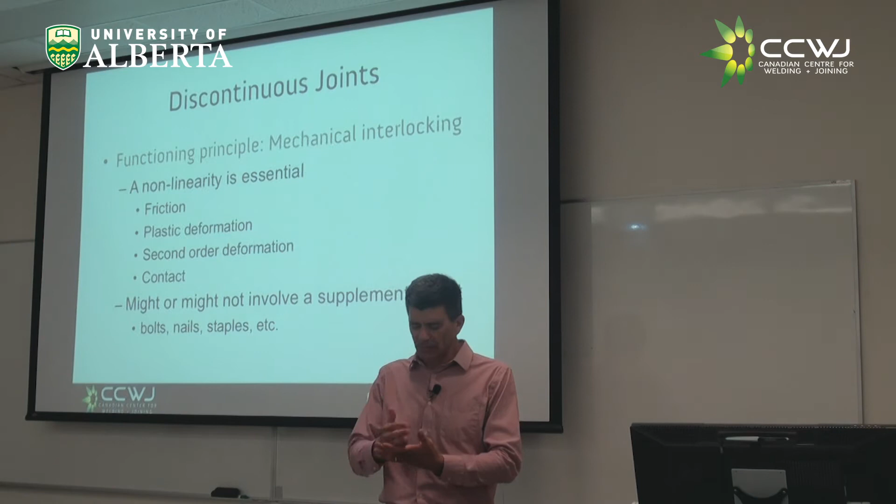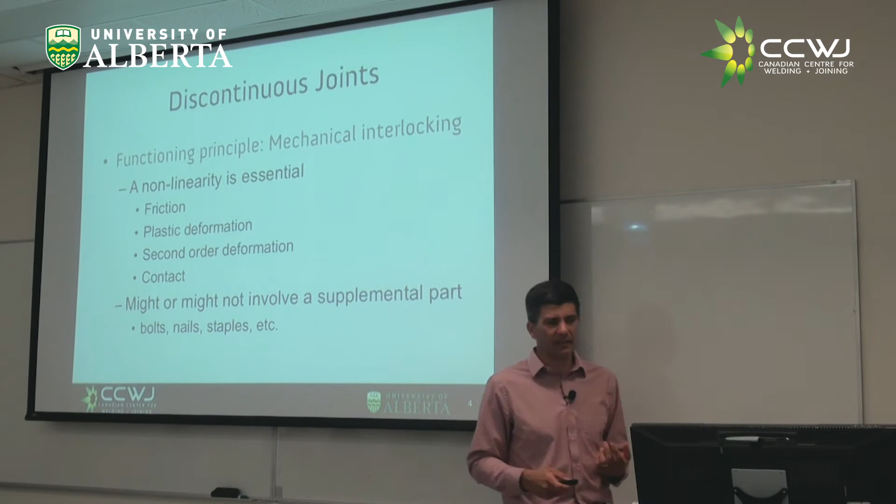So by going through this classification, there is also something interesting: if we make a taxonomy that is systematic, you might, if you're lucky enough, smart enough, given enough of a chance, by going through this systematic procedure, be able to invent or rediscover the joining technology you need, instead of just reciting what somebody else said or accepting what somebody else does.

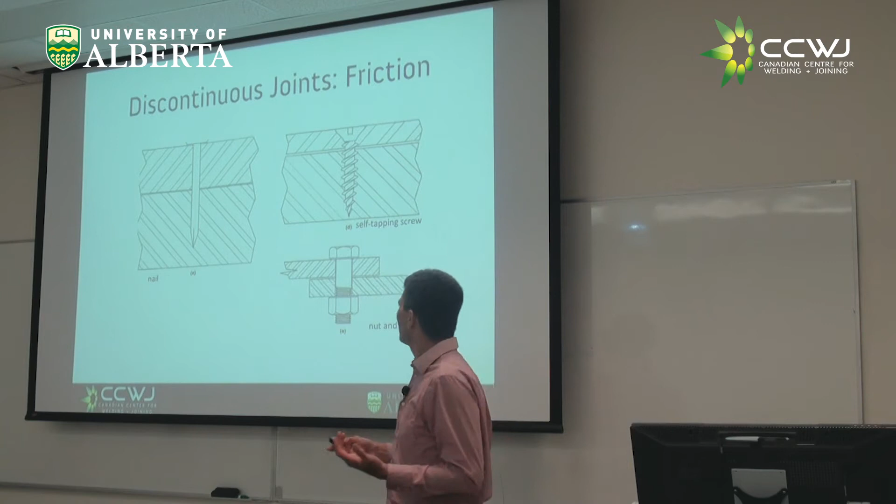So friction, for example, a nail. Have you ever thought that what holds two pieces of wood in your deck in your backyard is friction? If the nail was perfectly oiled up, it's good for nothing. Same with the screws, right? You screw something. If it wasn't for friction, you cannot get two things together, right? Nuts and bolts, self-tapping screws.

I mentioned this other nonlinearity, plastic deformation. For example, here you have a folded joint, right? Chances are that everybody here likes either beer or soda or both. When you get a can, that can has a body and has a lid. If they're together, they're joined. How are they joined? They are actually joined with this folded type of joint, and that involves plastic deformation. If you don't deform plastically, it's going to come out, right?

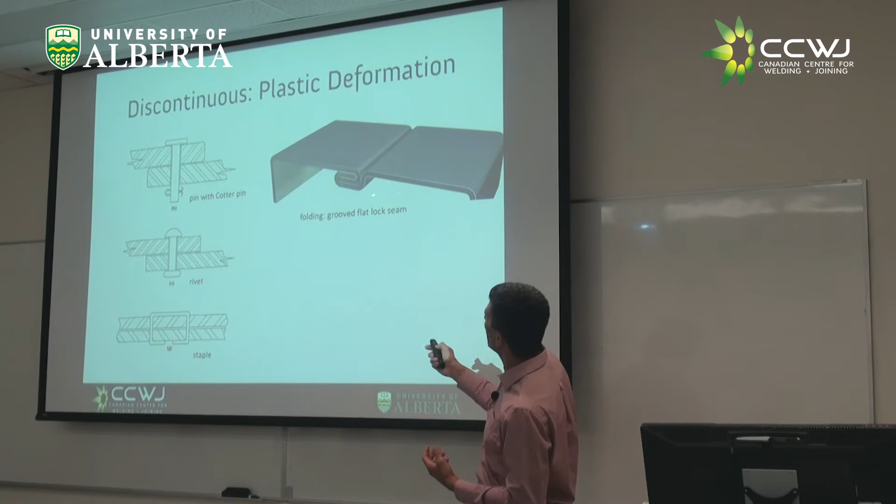Rivets, plastic deformation. You can have a pop rivet with the machine, or you could do super old school, the rivets that were red hot and you were hammering on. But in the end, the reason a rivet is keeping two things together is because you deformed it plastically. Same with a staple. You have an additional part in these cases. In this case, you don't have an additional part, but in this case, you do, right, for joining.

Second order deformation. Doesn't that sound like a cool buzzword here. Second order. It's not first order deformation, it's second order deformation. So what is this, right? First order deformation is a deformation that is so small that if it goes left or goes right, it's essentially more or less the same as not having gone anywhere. But second order deformation is something that moves enough such that moving a little bit to the left or to the right is not the same.

For example, if any of you ever tried to open about 10-year-old or 20-year-old electronics. Now they are all glued, the electronics. If you open a phone, it's glued. But before, they had this type of snap joints, right? So the snap joints are the ones that you put together and you hear snap, right? And so they can be irreversible when they are like a hook, right?

Why is it second order? Because when you press it, it came in and it deformed a bit. And when it wants to go out, it's not the same, right? It's locked. So it can be irreversible if it is a hook, it can be reversible if it is kind of this button, right? An example of this, like these snap-on buttons, right? That is second order deformation, right? But not plastic deformation, otherwise you could do it only once, right?

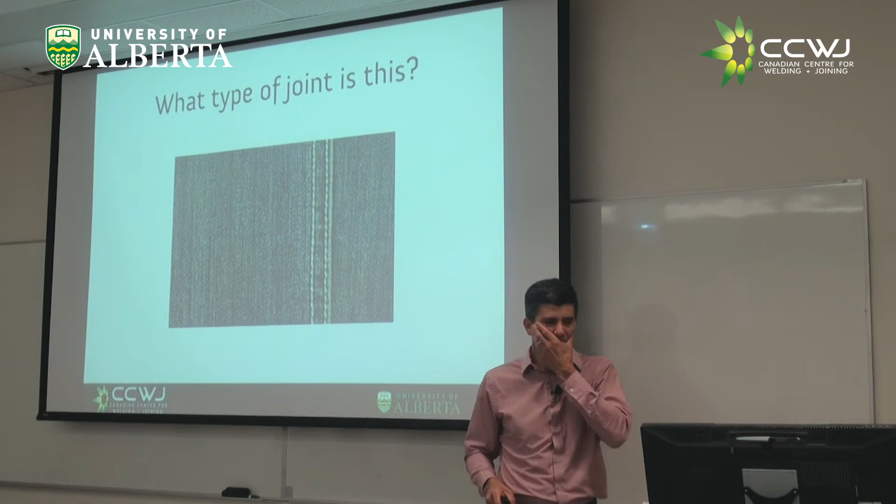Before we move into what is interesting, what type of joint is this? Say? It's a seam. That's a seam. That's good. And now this type of joint would be continuous or discontinuous? Yeah, I didn't teach you anything else. So good choice. And of course, this is discontinuous. There is nothing chemical in this. This is jeans, right? Like the stitching of jeans.

So what is the nonlinearity that we have here? What is the nonlinearity? Say? Friction. Do we have a supplemental part? Yeah, that's a thread, right? That's a supplemental part. It would be much like putting a staple, but in that case, the nonlinearity would be plasticity, right? But the beauty of this is that it's easy to put in and out. Remember last class I told you how knowing how to weld was so important to the Germans or to the Russians, and not doing the welds right was so bad in so many cases?

One of the keys in the development of humanity was joining, because putting the pieces of fur together to make clothing required joining, stitching. That's a huge invention. The reason we're not hairy like monkeys is because we could steal somebody else's hair, right? That's the only thing that helped us survive through the cold and all those things. And that all comes to joining.

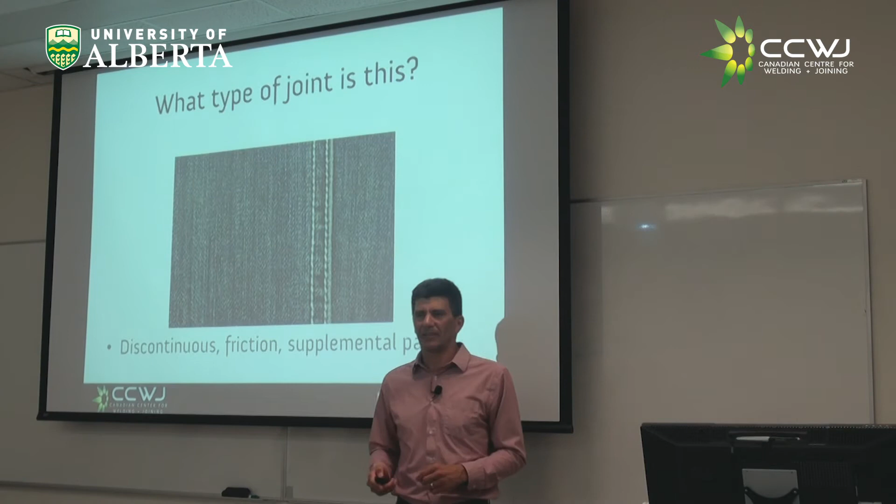But that's the joining of the Mechie, so let's forget that. I'm a Mechie, but I betrayed my roots, I guess. There you go. Discontinuous friction supplemental part. Super important. Who knew, right? No joining, no humanity. And the monkeys would get to keep their fur, right?

And whatever, the bisons. So let's talk about continuous joints. Those are the ones we care about, but this is still way beyond welding, because the key concept here is that now the atoms share their orbitals. And it can share the orbitals at many levels. This sharing of the orbitals is called rapprochement. I don't know who came up with that word. Again, another cool word to drop at a party. So this Friday, you guys are ready.

So this bonding can be chemical, in which things are really together, or can be more subtle, like van der Waals forces. You might have heard of van der Waals forces, right? Those are not a chemical joint, but the polarity of the molecules makes things stick together. For example, the screen protectors on cell phones, they have no glue, but they're stuck there. How? Van der Waals forces, right?

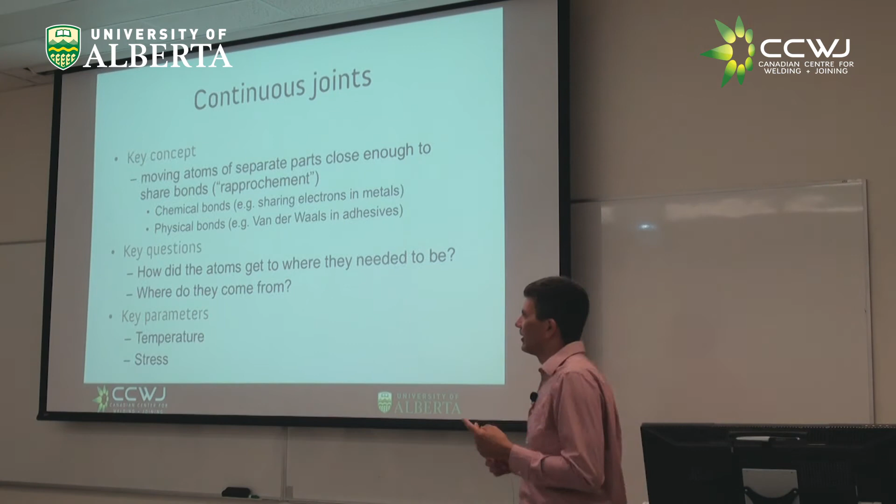So there are two key questions when we classify joining processes. One is how did the atoms get to rapprochement? How? And the second question is, where do they come from? Those two questions give us a sense of pretty much everything that means putting two things together in the form of continuous joints. Like anything else that involves chemistry, the key concepts here are pressure and temperature. Or pressure, let's call it stress.

Let's get the first. Diffusion bonding, right? People make a living out of this. We do close to none of this here in the province. It's called diffusion welding, but welding has a proper definition, and this doesn't meet the definition of welding. So in diffusion welding, you don't melt things. It's super gentle. And also, you don't put too much stress. This is like, I'm going to put the two of you together there, I hope you join. And they join. It's crazy, right? You make planes with this. You make crazy stuff with it.

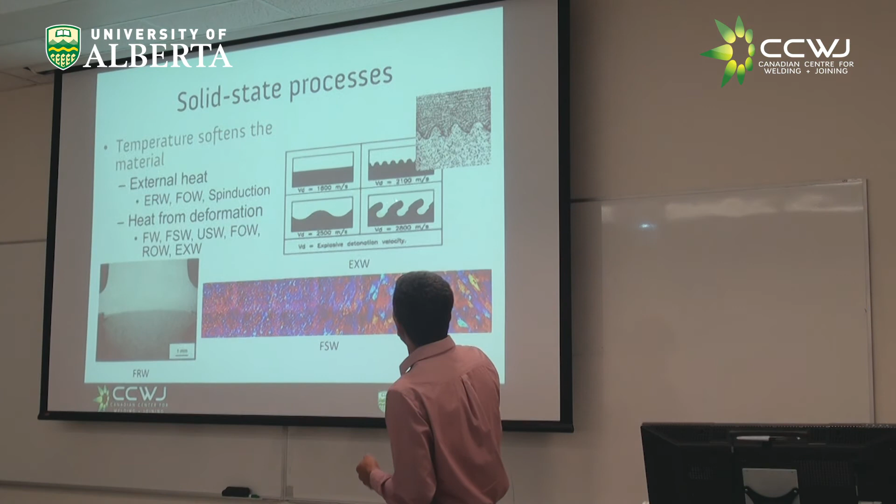This thing here that looks like the waves of the sea, that's called explosive welding. And guess what? It's because you're exploding something. That was discovered after World War I, in which sometimes they would see shrapnel or cannonballs stuck to the metal. And people said, why is it stuck? And what they saw is that when two things hit each other in the right conditions, you can have supersonic waves inside,

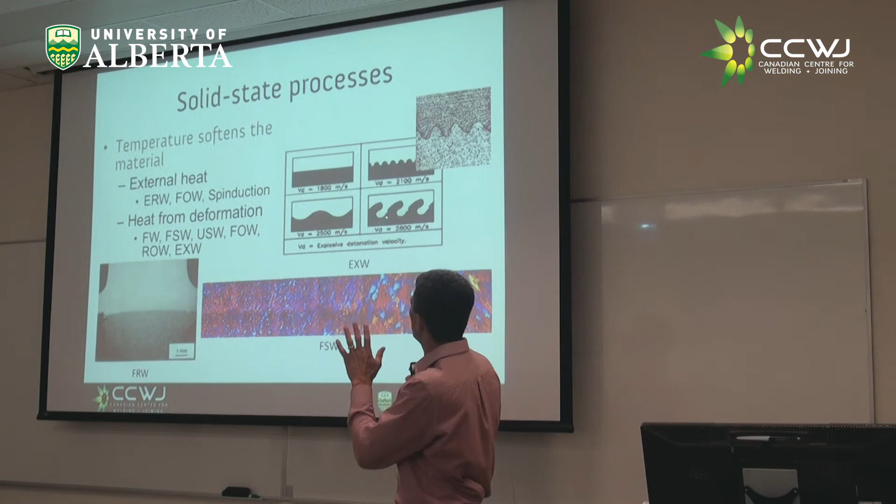and they can create localized pressure and very high localized deformation. With explosive welding, the interesting thing is this is a cross-section of a weld, and this is one piece of metal, this is the other. There might or might not be rapprochement there. It's very close, but there is mechanical interlocking, right? And for that reason, you can make things that are very dissimilar stick together.

We care about this because this is a technology you use to make layered plates for chemical reactors in which you want to have steel on one side and titanium on the other side. You cannot do that with fusion welding because you'd have a lot of other problems, but explosive welding can. Very few places can do explosive welding. You can imagine, it's not that in our lab downstairs where you guys are going to do your hands-on we can detonate an explosive charge and get away with it, right?

So what are we talking about? Joining. Joining is putting two things together. If the atoms don't connect with each other, it's mechanical; I just wanted to expose you to that. Then I said, okay, now the atoms are together. How do they come together? Well, because we hit them with everything we had, right? That's the solid state process. The other one was like you let them gently get together with diffusion.

Okay, let's say we don't want to hammer them to death. There's another alternative. Let's put a liquid. The liquid will cover all the gaps, and this liquid would maintain the two things together. So these liquid processes, I'm going to divide in two types. One type is when the liquid comes from outside. It's external liquid. For example, glue. Piece of paper, glue, put them together, and they are together. That is an external liquid.

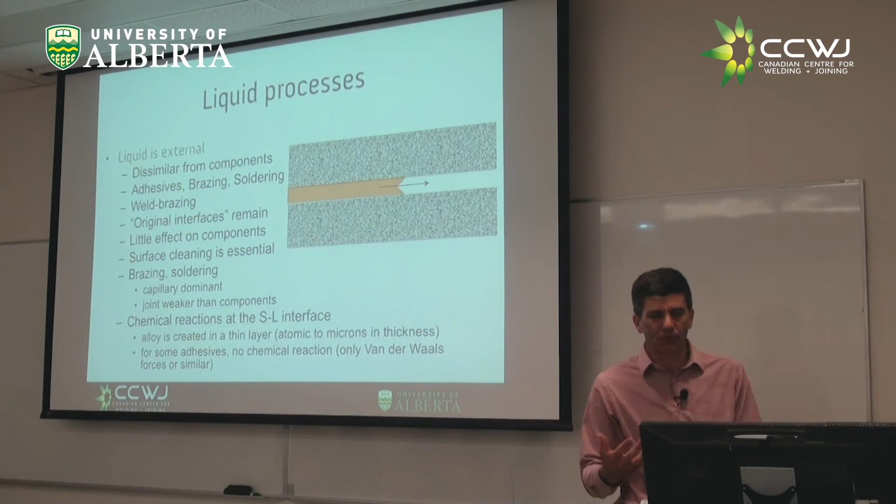For example, in a turbo in a car, typically you have a metallic shaft, and the turbo is made out of ceramic. The only way of putting those things together is with brazing, right? But then you have this high temperature metal, this high temperature ceramic, and you put a brazing, and you're ruining all these high temperature properties. That's a problem. There are ways around it. It's called transient liquid phase bonding. Don't worry, it's not in the exam. But this is one of the drawbacks of this approach. All right.

We're walking slowly into welding, little by little. So when I said, how do we get rapprochement? One is diffusion, one is like beat them to death, the other is just make it liquid, because the liquid will go and get the atoms in contact. Okay, fine. And then we said the liquid can be external, whether it's glue or brazing. Now, many people would kill me, say, how can you say brazing and gluing in the same line? Yeah, I'm saying it. And the president of the American Welding Society is not going to hold it against me. So the second question is, where do the atoms come from?

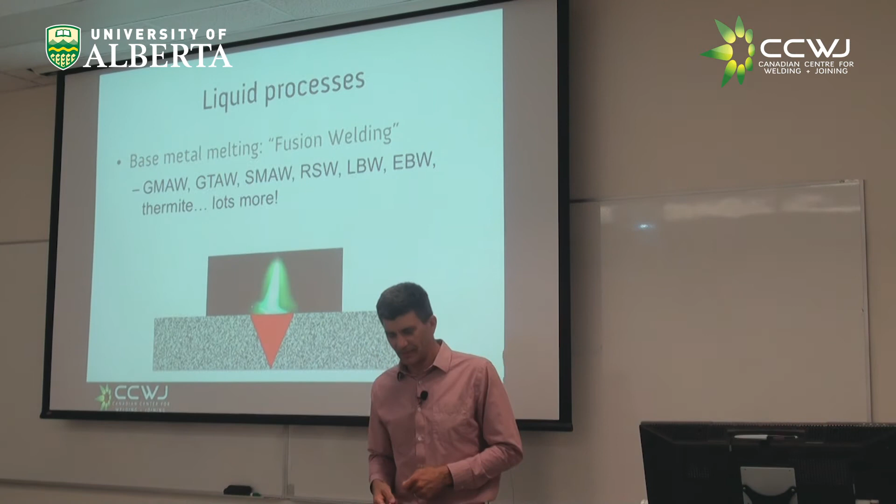So the glue comes from my glue thingy, right? But how about if I melt my same material so I get my atoms from the same base material? That's what is called fusion welding. That's normal welding, like you melt the metal, and now the metal that bridges this gap is its same material. And you see those acronyms? They don't mean anything to you. And you probably are terrified that you need to memorize them. And you guess what?

You'll be talking about that the way you talk in English or anything else, because these terms will speak to you. You'll know exactly what those are. You'll be able to do calculations on those. Right now it sounds like whatever. Soon enough you'll be saying, oh, well, let me tell you why GMAW is not the same as GTAW. I have so many things to say. So right now, just take it.

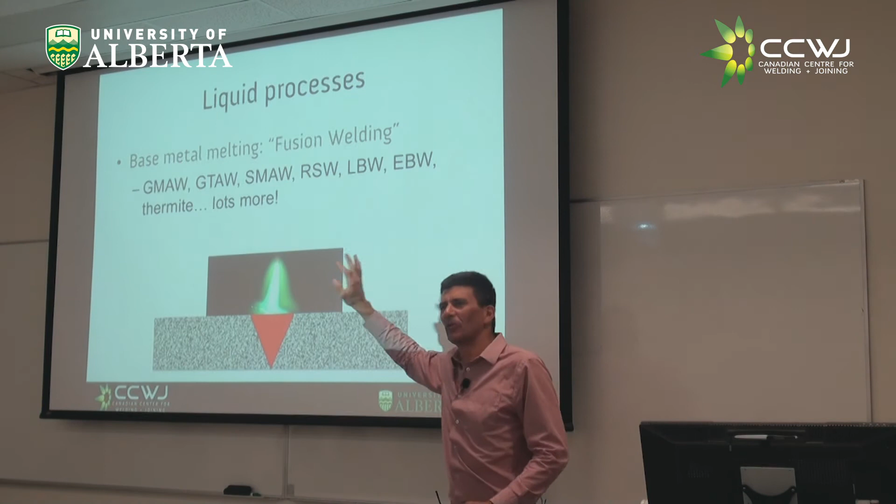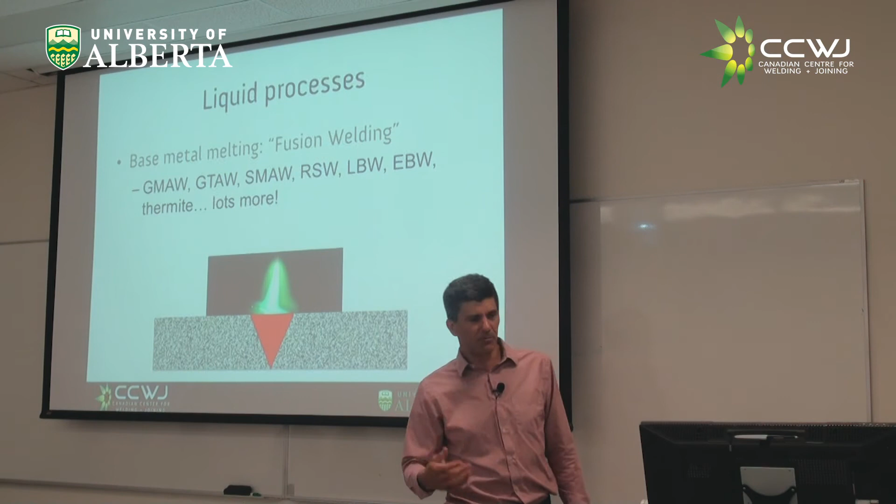All that matters here is you can get rapprochement in liquid state, and in cases like the metals, you can melt the base metal. You cannot do this with paper. And if you do, let me know, because we file a patent and we're going to be millionaires. But when we do this base metal melting, there are still more divisions, and things get narrower and narrower.

So you can have no filler, right? That is what is called autogenous welding. So I have two pieces of steel put together very well, but they are separate. I come with my welding machine. I melt that interface, and when it goes solid, it's one, right? Awesome. That is called autogenous. And there are good reasons to do that.

Now, you can have joints that have a filler. That is what we do in this province typically. You cut a groove between the two plates, for example, and you fill this groove with your filler, with the electrode, right? Of course, you have to melt a little bit of the base material so it's all together. Now, when this filler material is more or less the same as the base material, it's never exactly the same, so let's not get caught in mathematical subtleties. But when it's more or less the same as the base material, we're going to call it homogeneous welding.

Homogeneous. Any natives, how do you say it? Homogeneous or homogeneous? Oh, God. Okay, it's both. You have a take? It's wherever you're from. Homogeneo. If you're from Ontario, you'll probably say it one way. If you're from over here, you would probably say homogeneous. Okay, we're in Alberta. We're not going to speak like in Ontario. You got that? Okay, we have the camera. So homogeneous, right? So we call it homogeneous.

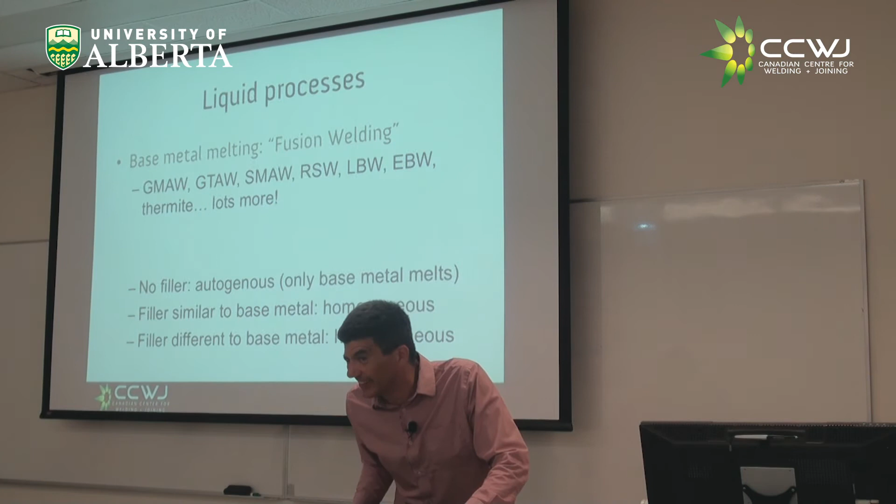But then the filler metal might be super different. What do you call it then? Heterogeneous? Or heterogeneous? I think it's heterogeneous. Okay, so I have a problem now. Okay, maybe I'll speak like Ontarians.

But we do this in the province. For example, you have a steel plate, and you want to make a wear-resistant coating. The wear-resistant coating is typically nickel-based, but your steel had close to no nickel, and the coating is pretty much all nickel, right? This is heterogeneous. You want to weld cast iron. Cast iron has close to no nickel, but the electrode you're going to use has lots of nickel. Good reasons to do it. And we're starting to see all these possibilities. What we do in this province, 99%, is this type of thing in steel.

Now let me tell you what. If you learn what we do in the province, it's good for you today. But it's a dead end, because what we do in the province today is not cost effective competing in a global market. So one of the reasons industry wanted to have this welding program and we're teaching this class is because we don't know exactly what to do, but we know we need to do something different than what we have done before.

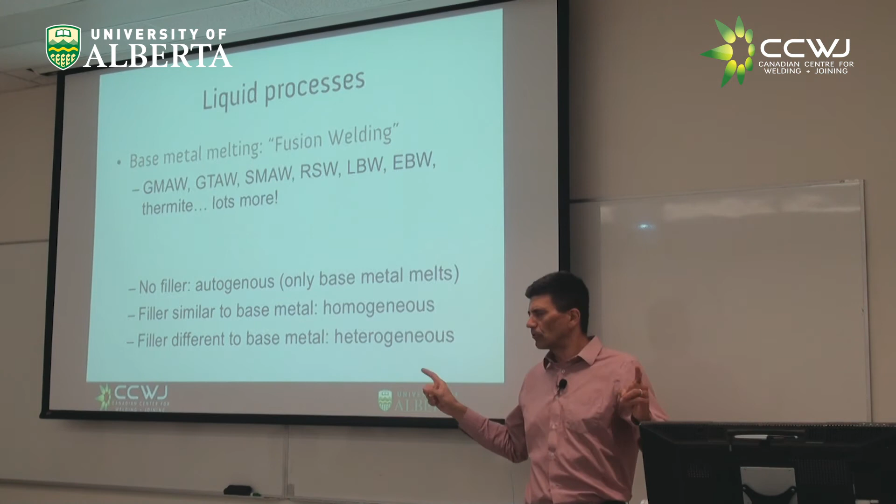So the reason I'm teaching you all this, including how to make wooden crates, is so your mind is open to all these things. And you might not choose all of them, but you're able to choose some of them, instead of being stuck on, we have always done it the same way.

So now we go back to our brackets. It makes more sense to you, right? Joining can be continuous or discontinuous. You know what that is. The continuous can be based on diffusion or based on some flow. The flow can come from heating the solid so it flows in plasticity, or can come from liquid, having melted the metal, and it flows.

If it is liquid, it can be without fusion of the base material, the case of glue and paper, or can come with fusion of the base plate. Fusion means like melting it, right? And that's the typical case of fusion welding. Now, if you do fusion welding, it can still be you don't add anything or you add something. And if you add something, it can be more or less the same or can be not the same.

So many things, right? And you're going to see that even between this, from here we get to stick welding, and in stick welding you get to 6010 and 7018, and that's all the province knows, right? Like this subcategory. All right, look.

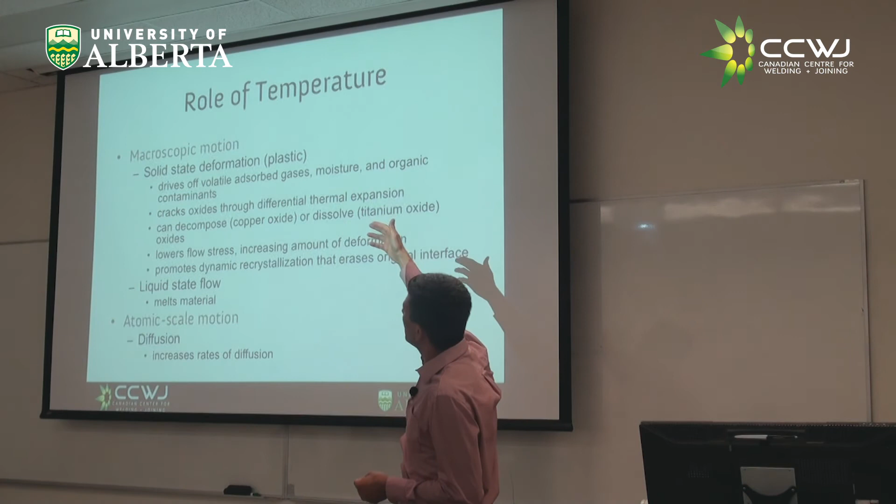So I mentioned pressure and temperature before. So what would be the role of temperature in this? Things that you can already think intuitively. In the case of solid state deformation, right? Temperature helps you in many things. The temperature will take out adsorbed gases, right? Like moisture, organic contaminants.

Something funny about welding. If you want to put two pieces of steel together, you imagine, yeah, if they're clean enough, they're going to come together somehow. But cleaning costs money, costs time. So the real deal of welding and joining is not putting two things together the way they should be. It's putting things together the way they are. They're rusty, they have oil, they have all kinds of weird stuff, right? So the challenge is not so much doing it, but doing it in a production environment with the real economic constraints.

So things like adsorbed gases, and moisture, organic contaminants, oil, right? Temperature also would crack oxides because they have different thermal expansion. Temperature can either decompose or dissolve oxides, right? So it's good in many aspects. If you do it wrong, the temperature can end up oxidizing things too if you don't have protection from the atmosphere.

Also, temperature lowers the flow stress. By flow stress, I mean when you're deforming things plastically, they oppose your deformation, right? But the hotter it is, the less they oppose you, right? Temperature also promotes recrystallization.

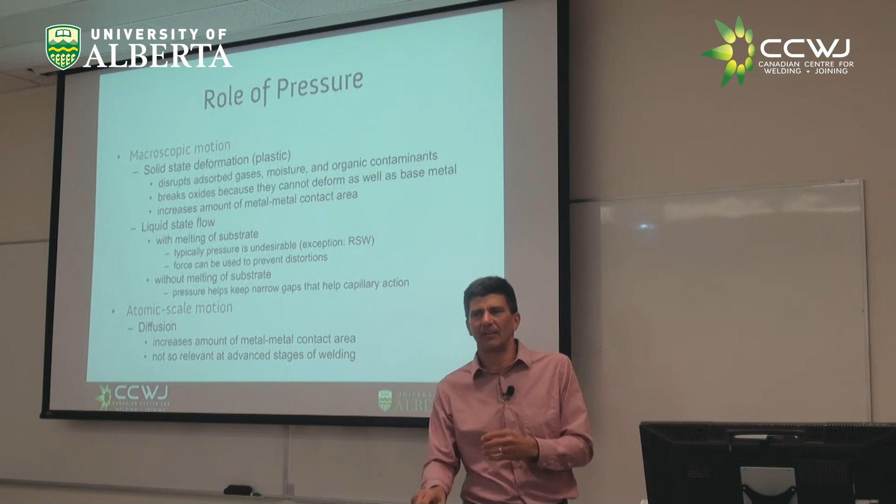So, and the atomic scale motion in diffusion, right? Typically, at the beginning, you want to put pressure, so you have these asperities in contact. But the funny thing about diffusion is when it starts to go, you let go of the pressure, and the thing sucks into itself, by itself. Very interesting, right?

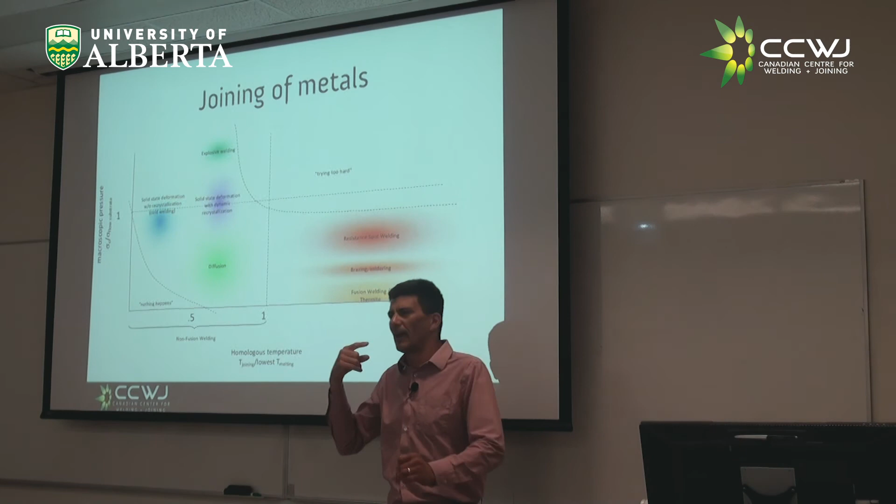So if you see this graph, now you can start thinking of other joining processes you would like to invent, or you have seen but we haven't discussed. They will likely fall somewhere in here. And you'll know also something else. If I don't put pressure and I don't put temperature, nothing happens. That's what the mechies do, right? Or the civil guys who bolt the structures, very bad.

Not to mention concrete. So now, if you put pressure and you put temperature, you're trying too hard, right? I mean, you're going to destroy the thing. So actual joining lives somewhere in here. The joining we're going to discuss in class is almost all this one here. But it's a whole world out there, a whole world that might be the world that saves us. So how are we doing so far? Do you guys have any question about this joining?

OK. I think this is pretty cool because it's going to help you see things with different eyes, more than the eyes of, I know so many welding tricks, the eyes of, all right, I need to put this building or this ship or this airplane or this oil sands truck together. What would be the best way to do it? I have a problem. What's the best way to solve it? Something broke. Why did it break?

Is it just low-quality material, or am I doing the wrong joining process? Should I bolt it? Should I weld it? Should I braze it? Should I glue it? All of those are open. Ships are welded today. But when you repair ships, I know this at least of the Greek Navy, because my first student was in the Greek Navy, the way you fix cracks in Greek Navy ships is you put, I don't remember if it was carbon fiber or glass fiber, and you glue it with epoxy.

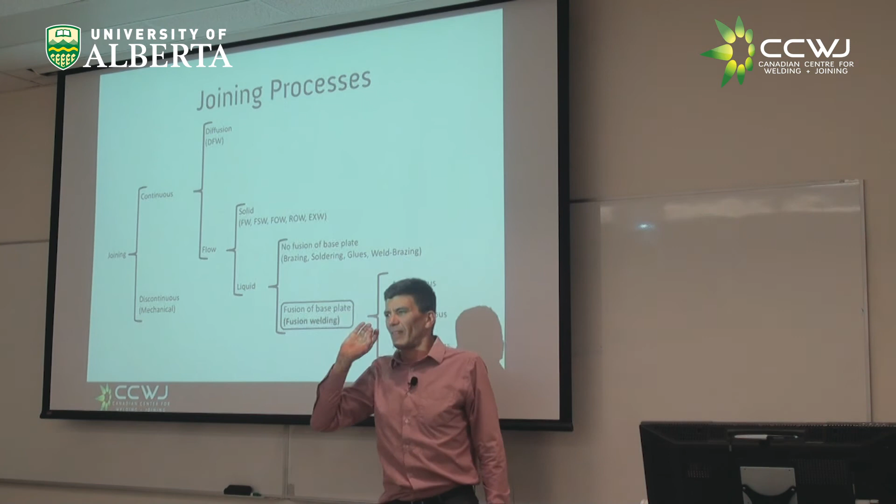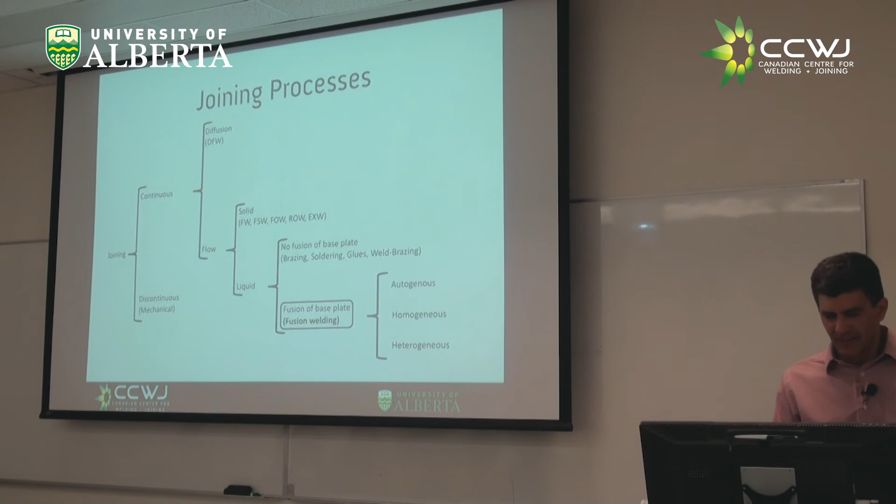So I want to tell you something that I learned from my advisor, and it's in the books because he wrote it. So in this whole thing I told you, fusion welding was this tiny thing. Right? Fusion welding is this. Now, fusion welding can in itself be classified into many, many things that are so different to each other that some people live in little boxes without ever knowing that other boxes exist, or if they know they exist, never talking to people outside. Isn't that funny, right?

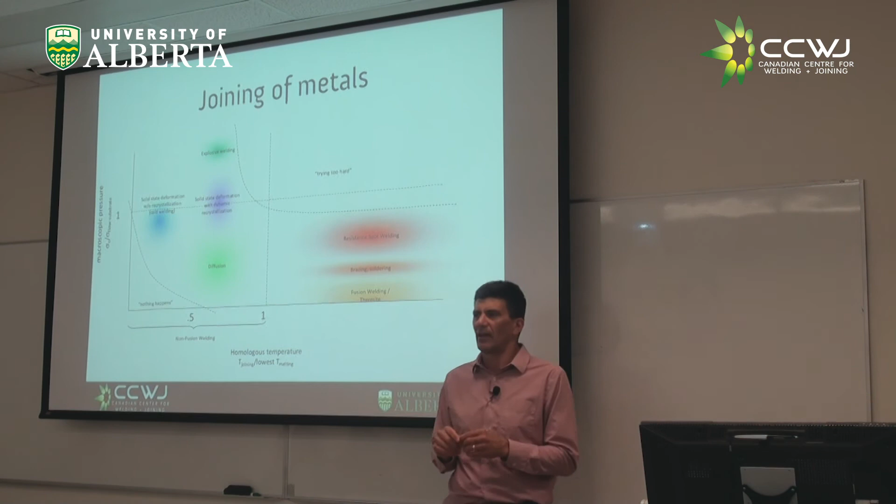And one good way, and I think this is super smart, one good way of classifying these boxes within fusion welding is by the intensity of the heat source, right? How do we create this local heating? So let me tell you something interesting.

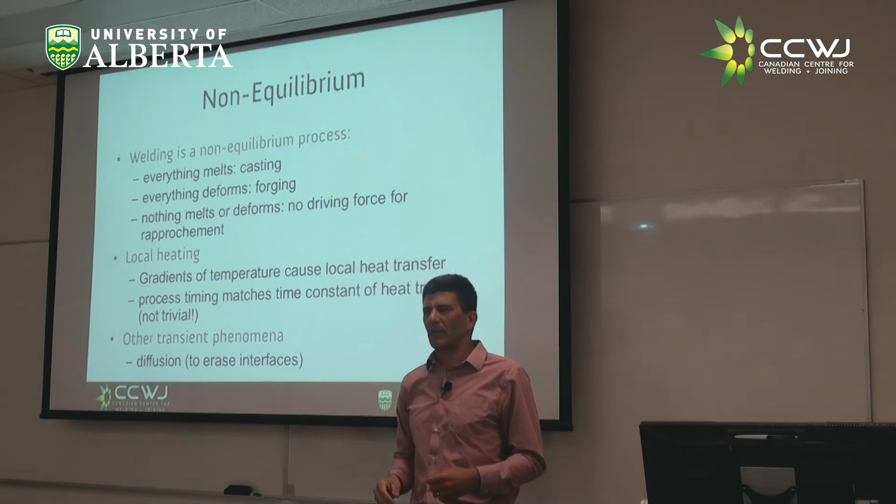So when I became a professor at Colorado School of Mines in the US, I had to write a very, very important proposal. And I wanted to work on welding. But in the US, it's not like here.

Welding is not so cool. So I had to write this proposal. I wanted to write this proposal in welding. But Tom, you said, that's good, just don't call it welding. Call it non-equilibrium processing, materials processing. And I got the money, and it was awesome. The funny thing, I did it because I had to do it, but this is so true.

Why is it non-equilibrium processing? Equilibrium means everything is the same, because if it is not the same, if it is hotter here than here, the heat is going to go. If you have more force here than here, it's going to move, right? Equilibrium means it will not move. It will not change temperature. But guess what? The essential characteristic of welding is this non-equilibrium.

For example, fusion welding, I'm melting something, but I'm not melting everything, right? I can melt everything, but I call it casting. That's another manufacturing process. Very good, but it's not welding and has very different properties. Okay, but I need to melt something, because if I don't melt or I don't put temperature somewhere, nothing's going to happen, right? No pressure, no temperature. So this is the amazing thing of welding. You have to make things happen locally, but not in the whole part.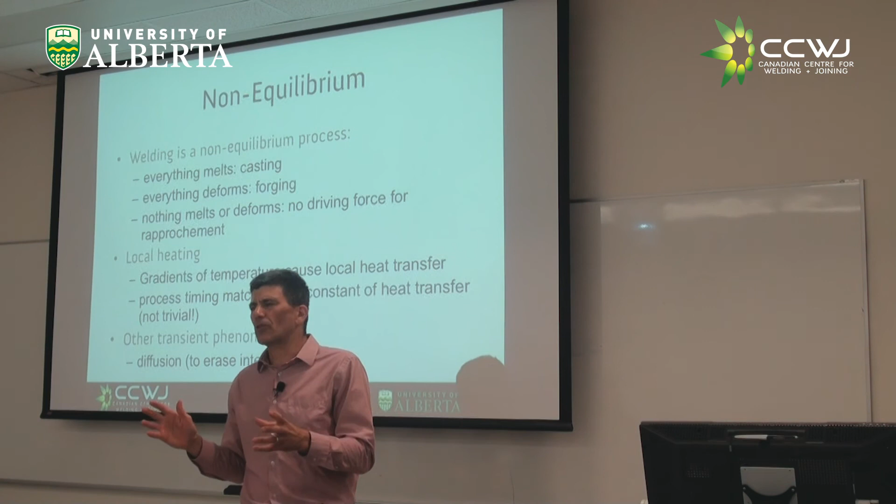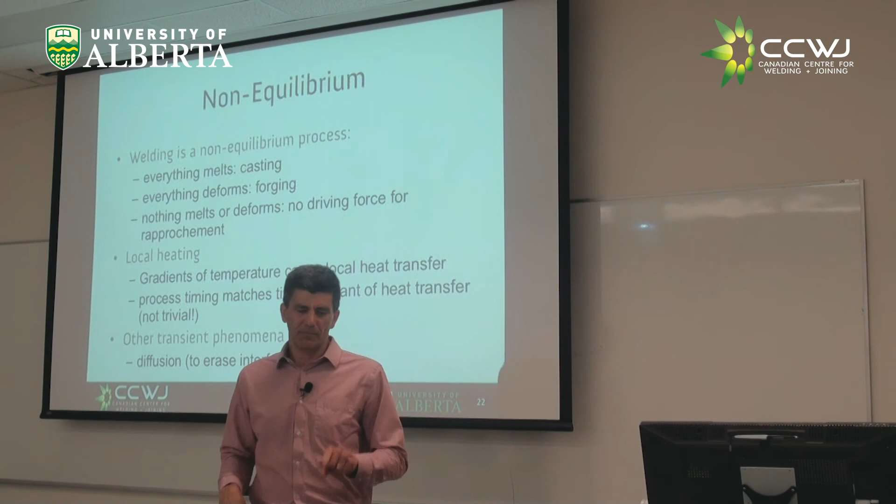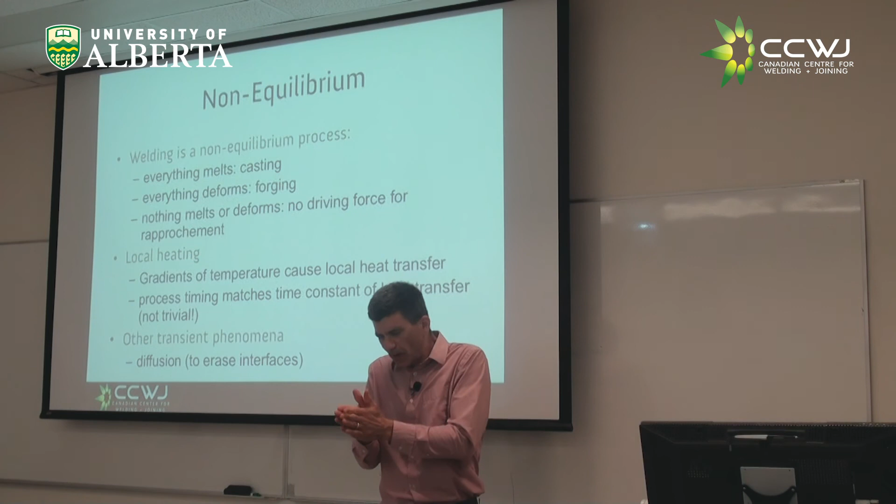And it means so much, because when you're joining two parts, you have to put money and effort into making this part, money and effort into making this part. Now you're joining it. You screw up your joint, and you lost not only your work, but the work of this guy who did this, and the work of that guy who did that. Huge responsibility, right? And you do it by affecting some parts and not the other parts.

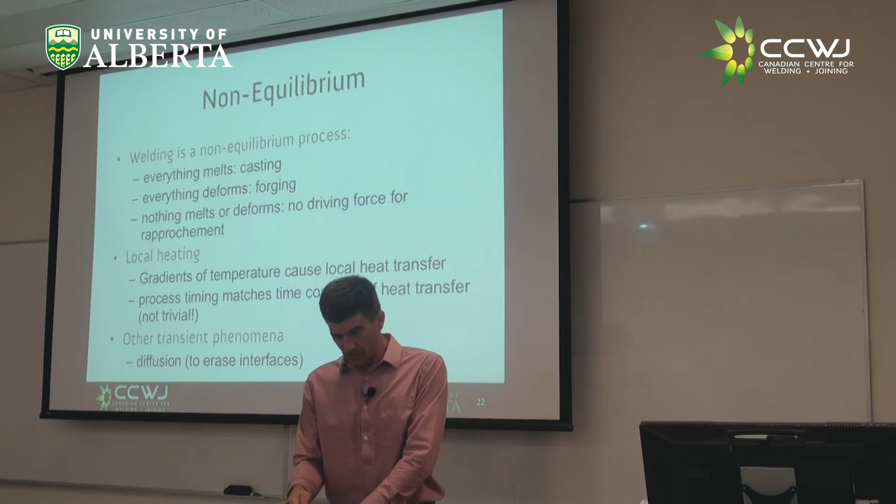And the most amazing thing of welding is that what gives you the right amount of heat with the surface tension of steel, with a bunch of things that didn't need to be, but God made them that way, that you can weld. If the surface tension of the steel was different, or the thermal conductivity of the steel was different, people would have never discovered welding. Welding was discovered, it was not invented. People saw an electric arc, oh, look at this heat, let's try this here. Oh, look, I'm melting. Oh, I can put two things together. The Wright brothers made their own welding machine, right? It's not that they were welding pipelines, but they could put two things together.

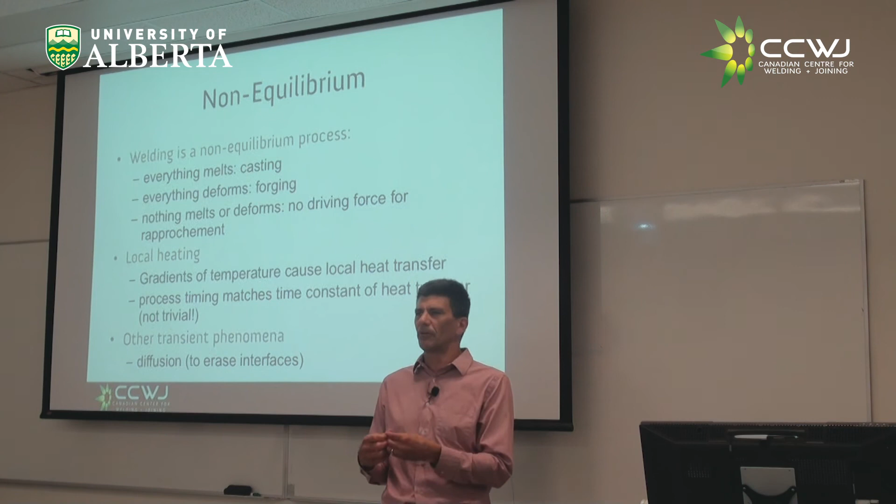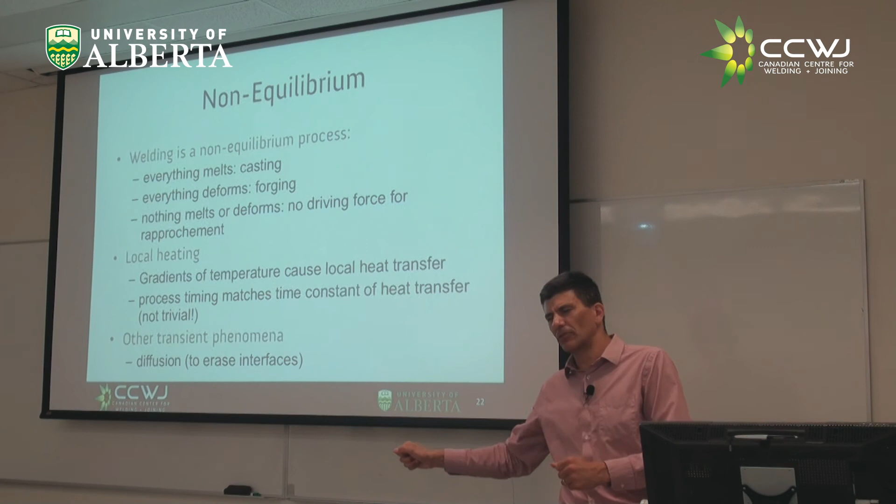But nobody understood why. And it's a miracle that just the amount of heat that comes from this big spark and the velocity at which your hand moves and the surface tension of the steel put it all together. It didn't need to be, but it was. And it's a huge change of technology, right? This has to be hot for so long, but not much longer because you melt everything, and not much shorter because you don't melt anything. It's so carefully synchronized with other things, but we never synchronized it. It just happened. It's amazing.

So energy sources. They determine some fundamental aspects. Nobody would disagree with me that laser welding is very different than oxyflame welding, right? You can imagine a laser welder is more expensive than having my flame torch, right? So that is very important. And we can classify welding processes. Many people do it by the source of energy. It can be mechanical, as we discussed, by plastic deformation, like friction stir welding, where the energy is generated internally by friction.

It can be chemical. If it is chemical, it would come from a combustion, like, for example, oxyfuel or acetylene, all those types of things. Explosion welding, right? It can be through a chemical reaction. For example, one way in which you would weld train tracks is called thermite. And it's a pretty crazy thing, which I'll show you. You can have a chemical reaction that is so hot that it melts the metal, but it's not a flame or anything like that. It's a local chemical reaction.

The source of heat can be electrical, right? And this is what we use the most in the province. So the electricity can create an arc or a plasma, right? Remember last Tuesday I talked about these plasmas and the high temperature? That's arc welding of all flavors. And it could be by resistance, for example, resistance welding, or by induction, although few people use induction as heating for welding. Or it can be radiation. So that's an interesting thing.

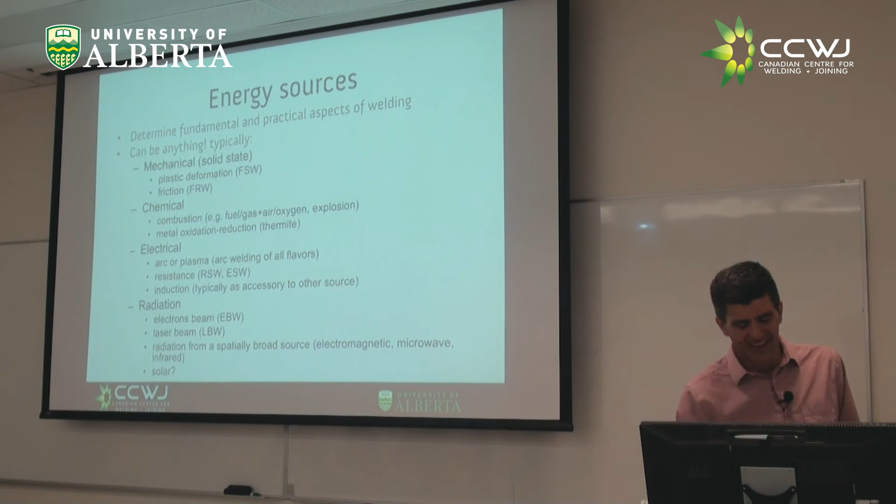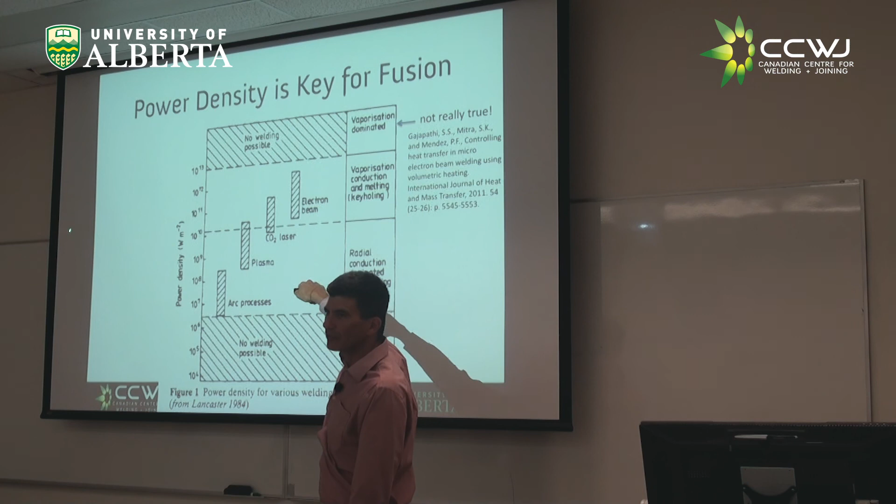Plasma, that is more or less the same, but with some constraints which we'll discuss next week, is a little higher energy density. Lasers or electron beams, those are called high density heat sources. Higher. This is log scale. So each notch means 10 times bigger, 10 times more intense. What this graph also says is that if you have a heat source that is not intense enough, you don't melt anything, right? And it's true.

And the reason fusion welding didn't exist until around 100 years ago was people had no way of getting straight thermal energy as concentrated as in an arc. But then with the discovery of electricity people started to play and they figured out, oh, look at this big spark, how hot it is. Then, without really knowing what they were doing, they started to move up here in power density.

Now, here it says that there is no welding possible when you have too high heat intensity, right? Because if you have too high heat intensity, you're not melting, you're just cutting, you're ablating it. There is some truth to that. But it's not the whole truth, because this is all done on the assumption that you put heat on the surface and the heat needs to travel under the surface. For that, you need a gradient, right? So if you have too intense a heat source, the gradient is going to be so big that you ablate.

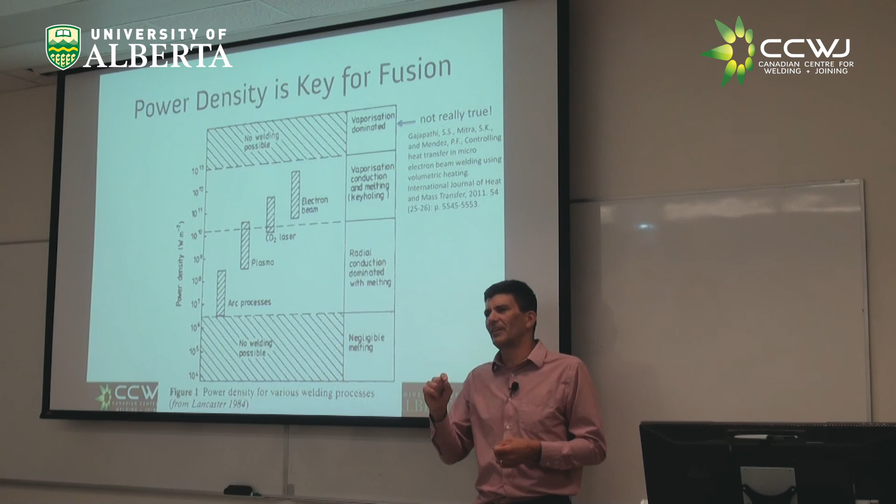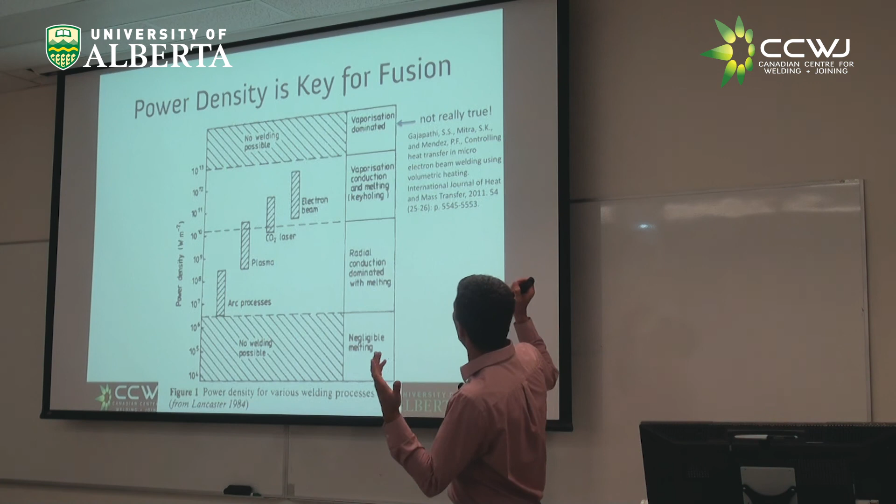Now, things like electron beam welding are like that for the most part. But if you're talking about microelectron beam welding, you have a penetration of the electrons that gives you volumetric heating. And then you're not constrained by these gradients, and all of a sudden you can do what is considered impossible. So we had a guy who did a master's on that and got a big international award, the Granjon Award. And I'm looking for partners to do the experiments. I sent this to John Elmer, but he couldn't do them because the conditions are very important.

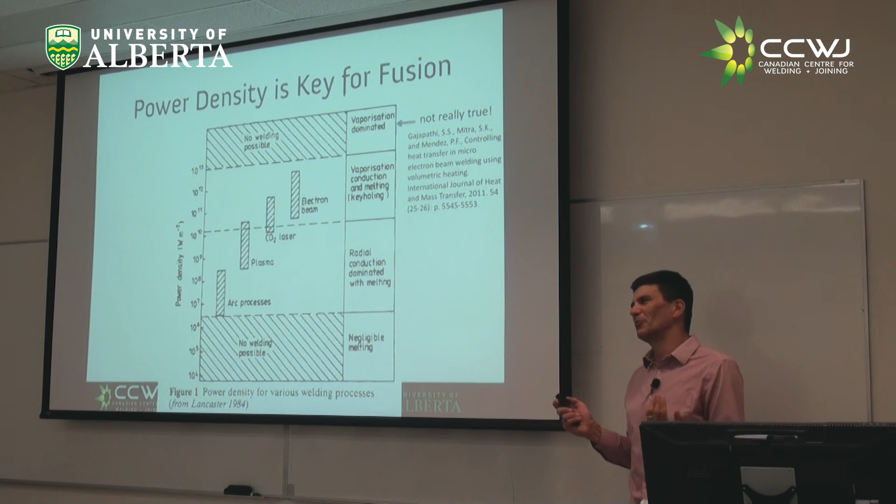I sent them to Mike Rothmeyer in Germany, but their power supply was digital, so instead of being one big, very fast seam it was stitches. I don't know, but I want to try it because all the theory indicates this is awesome, but until we do the experiment, we don't know if it is awesome.

So look at this chart. I put in this axis the power density. And that corresponds to different things, from fuel or flame joining to lasers, right? As I move to the right, more and more concentrated heat sources. d over w means depth over width. If the heat source is very broad, not intense, I have something that is very shallow and wide. But if the heat source is very intense, I can have something that is very deep and narrow. Very different thing.

And you need to check? Okay, I'm about to finish anyway. I have 5.

Efficiency, right? Melting efficiency means you wanted to have this joint, so you needed to melt so much metal. And you put so much heat. Do you put just the heat you needed to melt that metal, or you put a whole lot more heat? When you move very slowly, it's like having a bucket you're trying to fill with water and has huge holes. It's leaking all over the place, right? In this case, it's leaking heat.

That's bad. It's bad energetically, but it's also bad. Guess what that heat does? It affects everything around, including creating distortions and residual stresses. Things like a laser, it's very efficient, very low distortions, very low residual stresses.

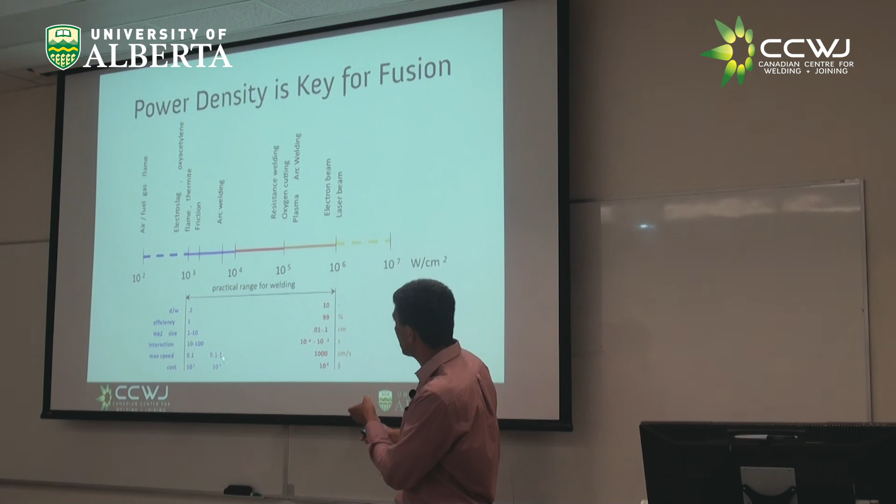This is a super interesting one. The intensity of the heat source also tells you that in some cases you can only have an automated process. Things like a laser, if you spend too much time with the laser stopped, it's like when you're ironing your shirt. If you leave it for too long, you're going to burn your shirt. If you leave the laser for too long, you're going to drill instead of weld. So you have to move. But now, are you good enough to move that fast and still keep on the line? You're not. That's given by the interaction time.

And you can calculate this interaction time, right? And this is the range. And this is a calculation of my advisor, Tom Eagar, at MIT. And so he says, depending on the intensity of the process, and here we have laser beam, and then we have arc, and then we have flame, the interaction time gets shorter and shorter as the beam is more and more concentrated.

Interaction time of humans is of the order of 0.3 seconds, right? This is the time it would take you to step on the brake of your car or to correct your torch as you're welding. And if you do that, you see where this interaction time humans have compared with the interaction time of the weld.

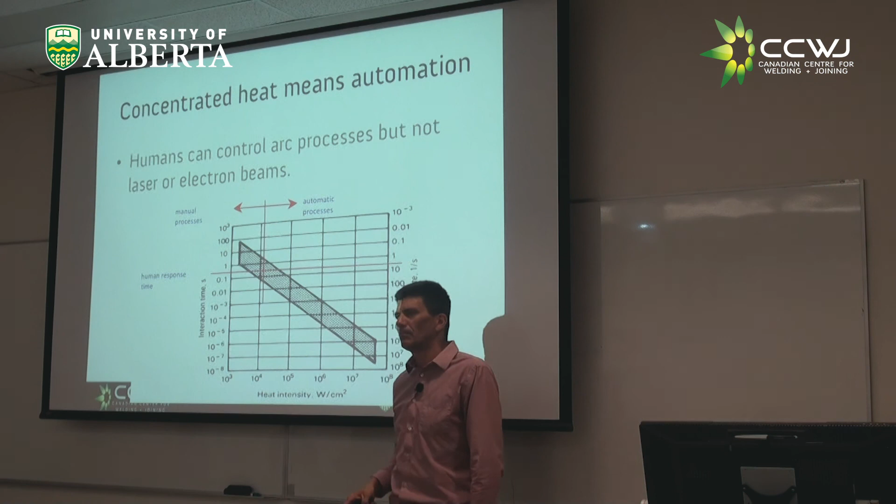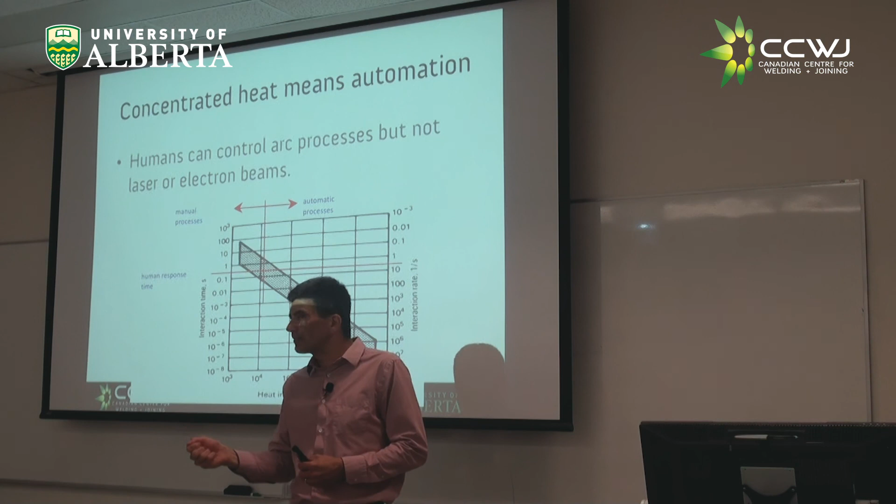You come to the conclusion that you can do flame welding, like chemical welding, acetylene welding by hand, no problem. You can do arc welding kind of okay. Plasma, very iffy, maybe, maybe not. Typically not, actually. Lasers, for sure not. Electron beams, for sure not, right? Because you just cannot do it. And this means, in some cases, it will be a cheap process. In some other cases, it will be an expensive process that needs a robot, right? So much to say. Cost.

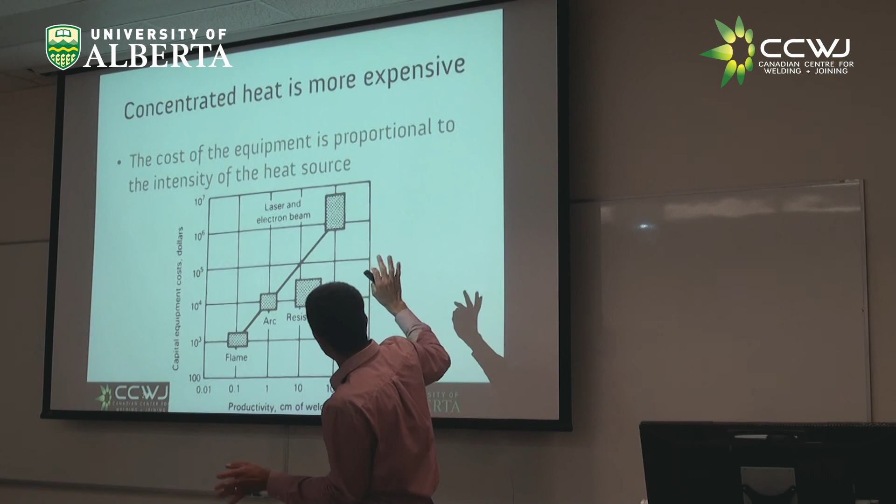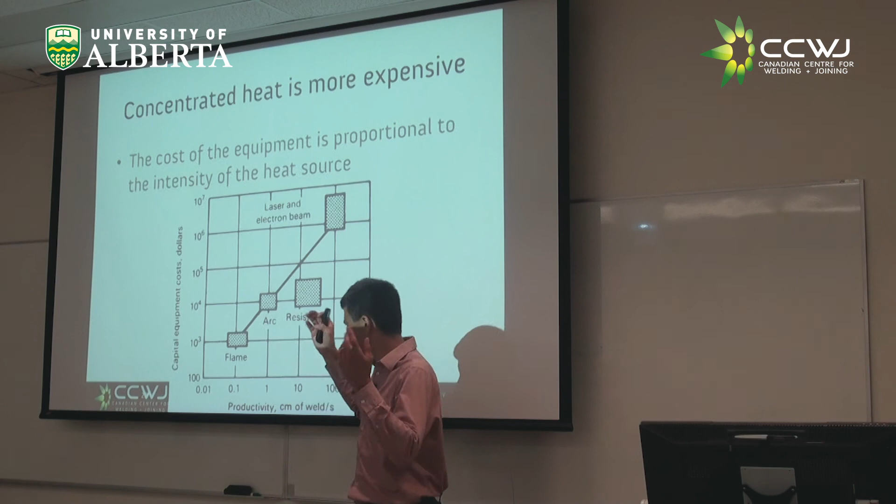This is a super old graph, right? But it still is not that far off. You want to buy your flame torch, all right? It's going to cost about $1,000, of the order, $2,000, $3,000, maybe a few hundred. You want a welding machine with an arc, $5,000, $10,000, depending how fancy you want it. Oh, you want a laser? Oh, well, let me tell you about that. Do you have $1 million here, right? Electron beam is even worse, right?

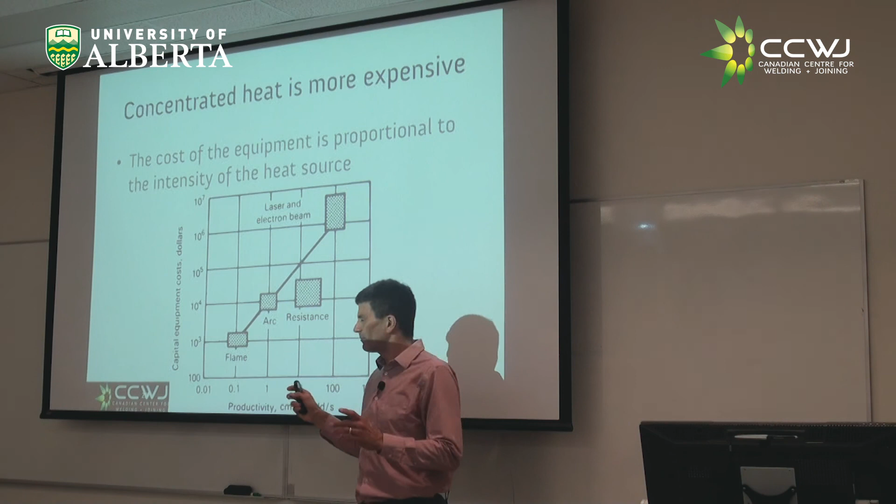So you start to see, oh, automation versus no automation, heat-affected zone versus not a heat-affected zone, money versus not money. And you start to see how decisions are made, right? And again, in the province, we do only this. Not true. We're doing quite a bit of laser now, right? We need to think about these things.